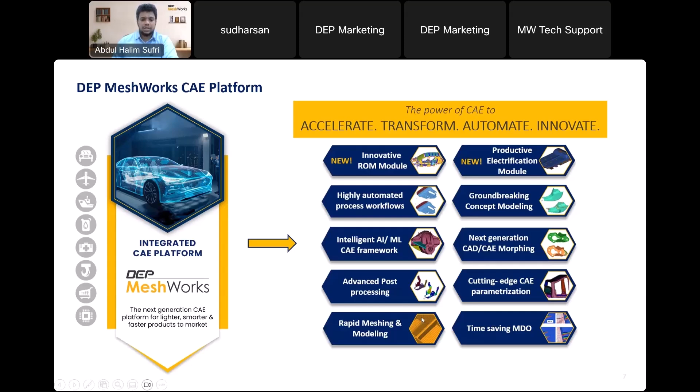When it comes to conceptual stage, MeshWorks morphing and concept modules will help. When it comes to concept and detail phases, MeshWorks CAE parametric approach and also CAD parametric approach is used, along with topology modules. When it comes to all these four verticals, there comes our MeshWorks meshing and model assembly modules, which is what you are going to see in today's session.

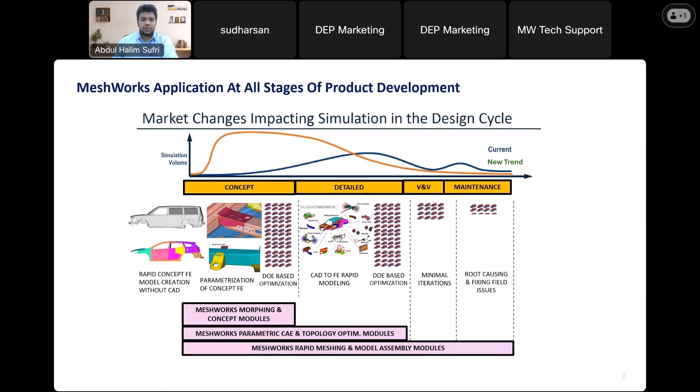That is what we are going to show as a live demo for today. In this session, we wanted to address tetra meshing and give a glimpse about our next webinar, which is morphing and parameterization. We wanted to give some glimpse about auto parameterization, then cover our plastics or mid-plane meshing, some hexa meshing techniques, and then some cool tools about our 1D and 3D bolt connection tools, and 2D and 3D welding connections, etc.

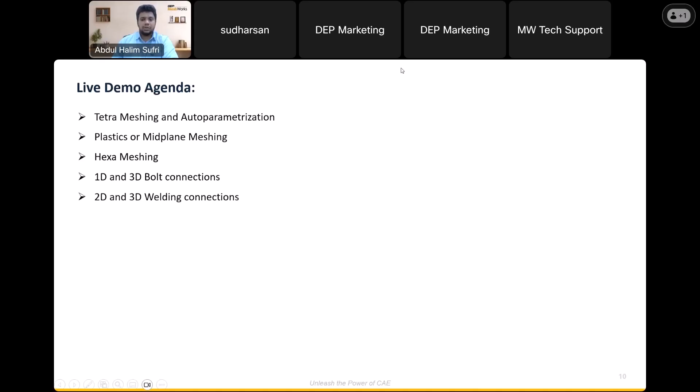I will start with tetra. This is a tet meshing model. Whatever model you are seeing is the cut section of an engine block. This is a typical casting part.

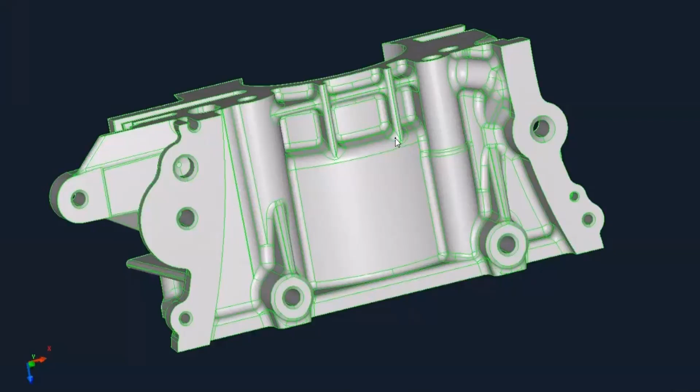Coming to meshing in MeshWorks, MeshWorks deals with template based mesh, which is an interactive batch mesher. Here we can select this component, and related to that component we can select the template. If we have multiple components in one assembly, we can add them here and give the same process, and I'll just execute here.

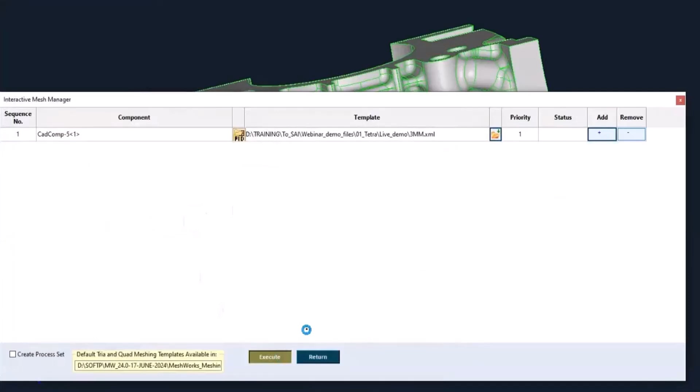Just I will give a small glimpse on how the template will work in MeshWorks. This is our MeshWorks template where we will give parameters. Before going into template explanation, I will show you the MeshWorks library template here.

Here we can see ample templates, all created in-house by DEP based on several case studies. Each template will be for different domains like crash and NVH. Now I'll be explaining this one.

Coming to the first page, here we can see general parameters. Create feature PID will automatically identify the tubes, fillets, and planar surface. Coming to tubes, tubes are based on a diameter range.

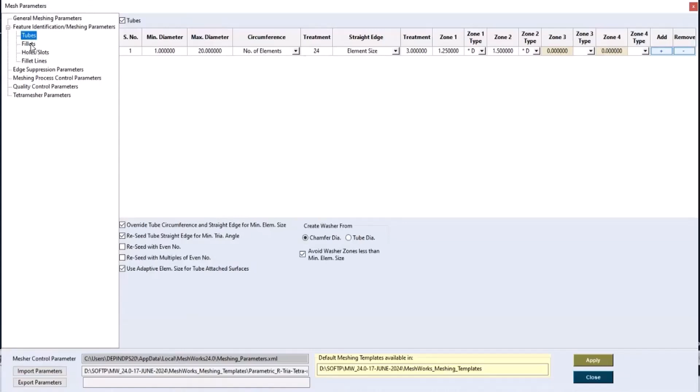Here we can capture the tubes, there are multiple ways to capture them. We can keep 4 zones of washers for tubes. Coming to fillets, here fillets are classified based on radius and range. The user can provide their own requirement to get the mesh.

Also for fillets, we have a unique tool called convex. Here we can separate convex fillet and concave fillet. Coming to quality control parameters, we can set the quality before generating the mesh itself in the template.

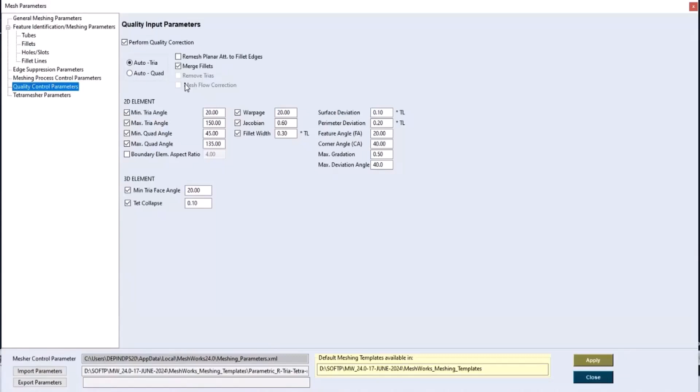Coming to tetramesher parameters, whatever layer we want, like volume layer mesh or higher order mesh, we can give it here itself, and we can save this template for later. MeshWorks template is highly customizable, and we can save it for later use in a similar way for components.

I will show you the previous window. This is the output after giving the template. We can see how nicely the tubes have been captured, along with fillets and planar surfaces. The mesh itself has become very good here.

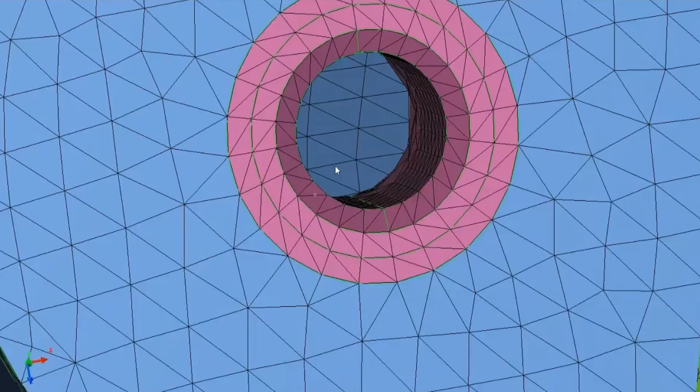Coming to the tubes, here we can see they got captured very well. We can see fillet regions here, and they got captured very well too. The user has no need to change any mesh flow; he can directly take this mesh to the modeling stage.

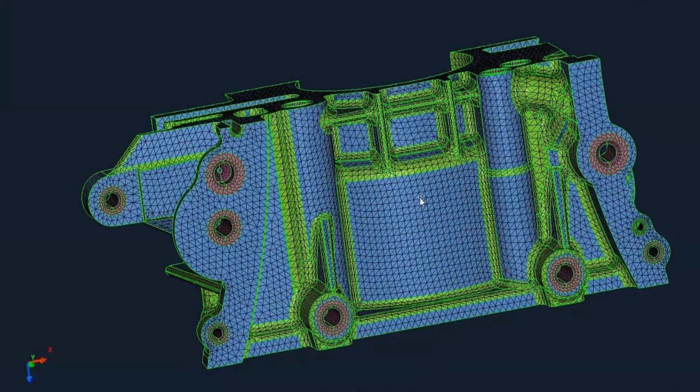Coming to the MeshWorks intelligence, here we can see a small sliver-like surface. By default, if it got captured here, it will definitely fare poorly for quality. MeshWorks has identified this as a sliver-like surface and projected it to the machined surface. This is how MeshWorks has the ability to maintain all machined surface edges, even after doing all the flow correction and quality correction.

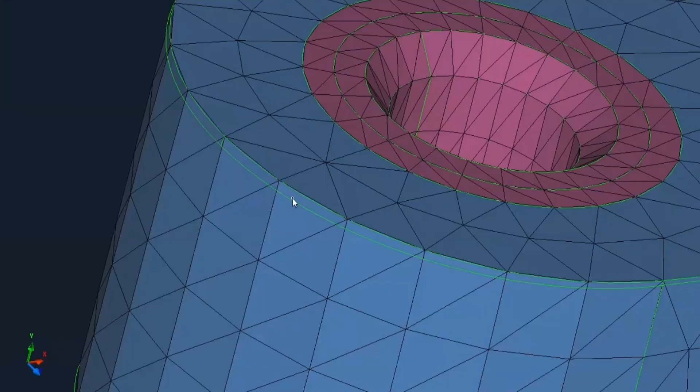Now I will show you the sliced view. Here we have a growth factor like this, and we can see how nicely the mesh has been growing.

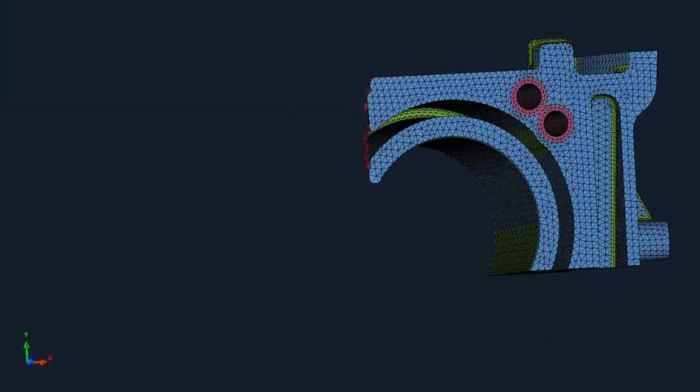Once you've done all the meshing in MeshWorks, the model will become parametric. Now we can perform parametric changes on this model. We have a unique tool called auto parameterization casting. Before going into the tool, let me explain: even if the user is not from a morphing background, if you want to perform a quick DOE study and introduce parameters in hotspot regions, you don't need to depend on a morphing engineer. Any FE engineer can do the morphing with this auto parameterization casting tool. I will show you the auto parameterization casting now.

I'll switch to the morphing tab. These are the four preset parameters in MeshWorks. I will show you the fillet.

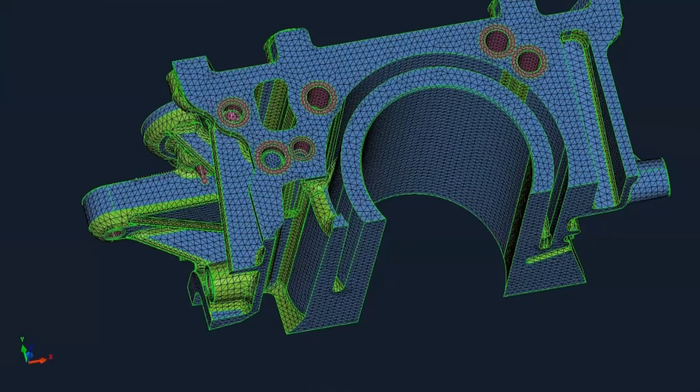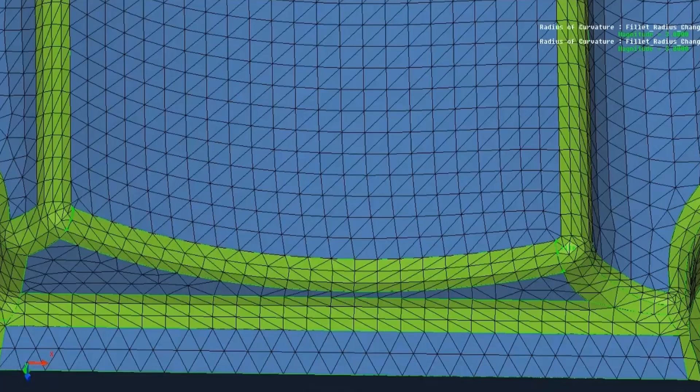Select the CAD surface and just click on execute. At the top right side, we can see the sensor. It is showing the initial radius. We can change the radius. Just let me unlink it.

Here we can observe the radius getting changed. The CAD surface fillet can be changed like this, and we can perform a quick DOE here and save it for later. Similarly, I will show you the tube diameter change.

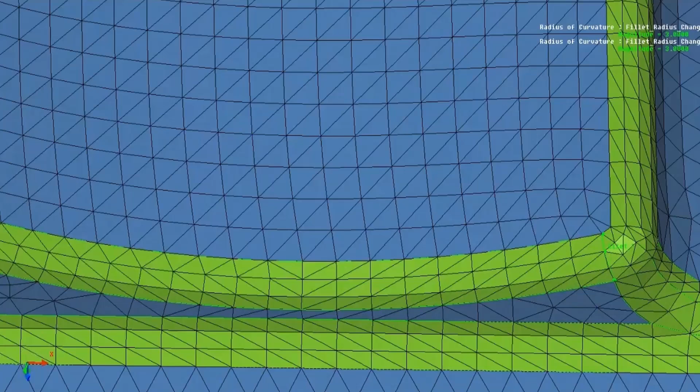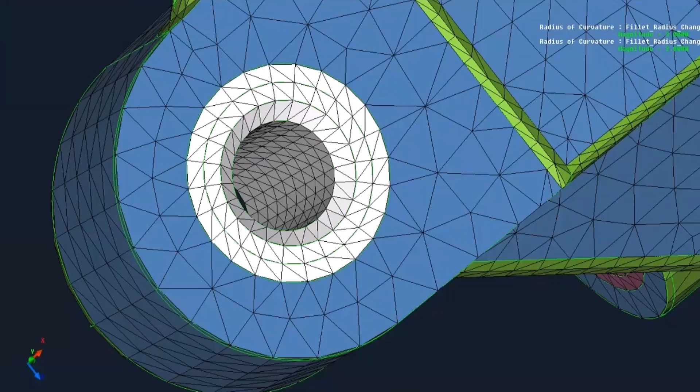Just let me select the elements and click on execute. At the right side top, we can see the sensor for the tube diameter radius. We can change the diameter of the tube by reviewing it. Just let me unlink it.

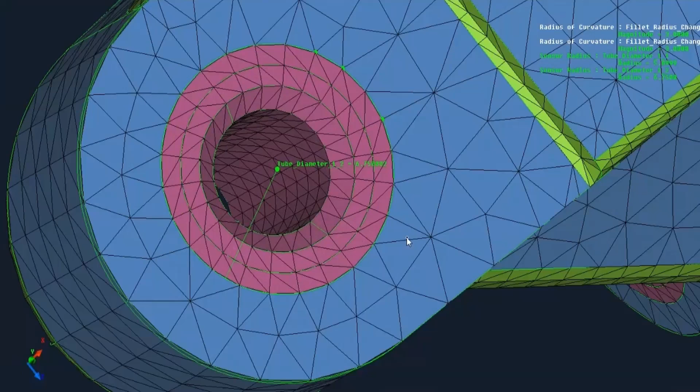Here we can observe how nicely it is getting changed. This is how we can perform parameters in meshing, creating different kinds of parameters directly in FE models.

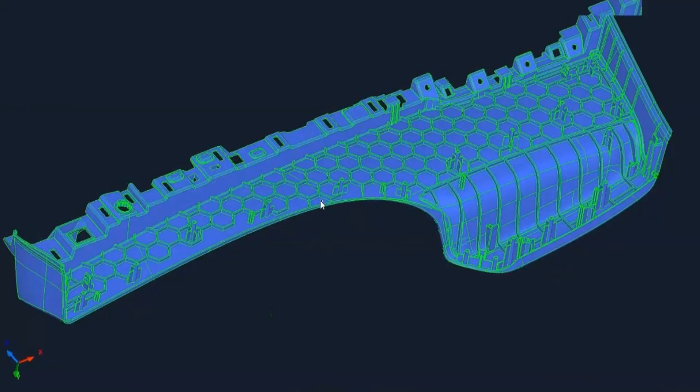Now I'm going to switch to the plastic model. This is the armrest model. In this model, I'm going to explain the workflow. Here we can see so many heat stakes, doghouse, honeycomb ribs, and fillets.

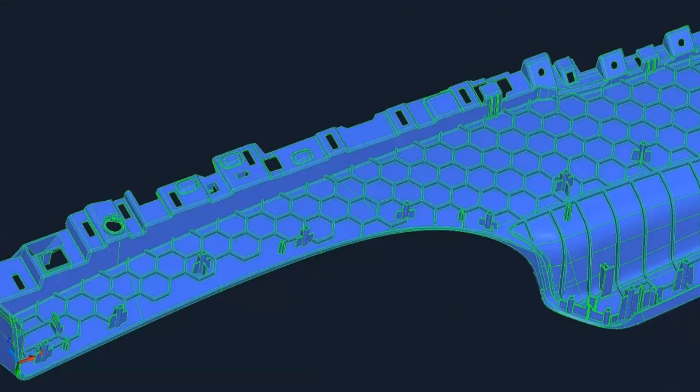All of this will be captured using background processing. We are using a machine learning algorithm that automatically identifies features known for CAD identification and feature identification, including auto generation of mesh, which automatically stitches to the base components like the heat stakes. In MeshWorks, we also have a template for plastic, called auto mid-plane mesh. We just need to select the surface, and all these options will be performed in the background using the machine learning algorithm.

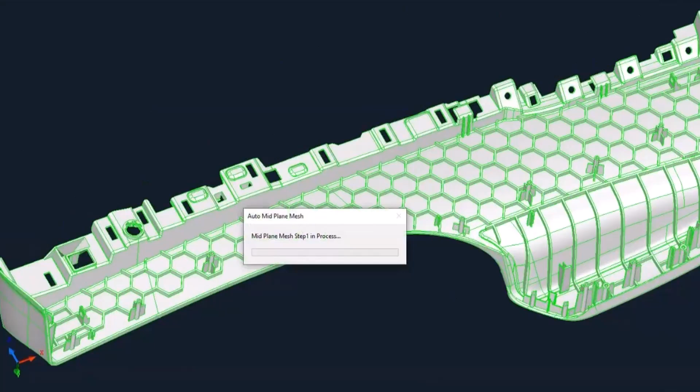In advanced inputs, this is the template for the plastic. Then just click on accept and execute it. It will take a couple of minutes. I'll show you the output.

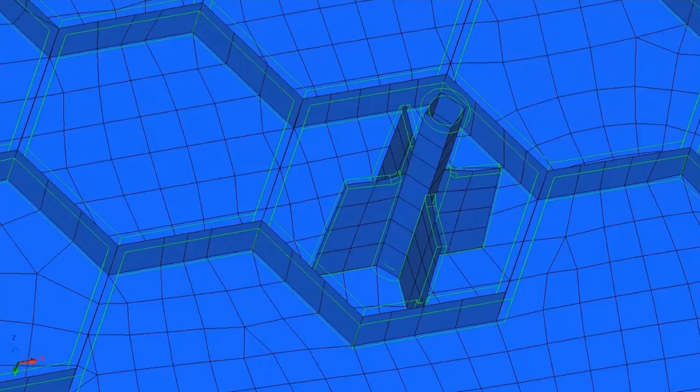This is the output after generating the mesh. Here we can see how nicely the heat stake got captured, and it is also properly projected in the mid plane. Here we have layered fillets, all captured very well. Here we can see how nicely the rib has been projected and stitched to the base, and all of this got projected in the mid plane.

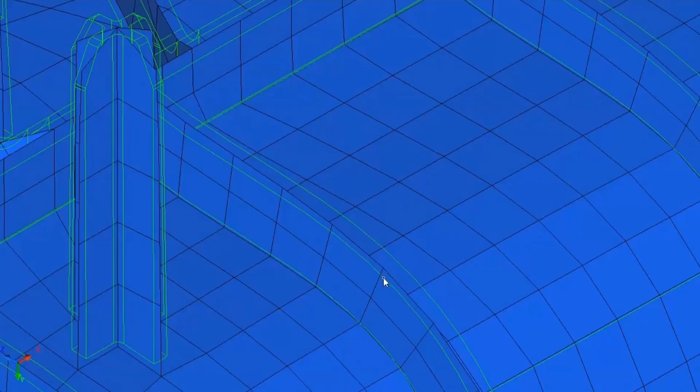Coming to mesh flow, to improve the mesh flow in MeshWorks, we have ample tools to do that. I will show you basic mesh editing. To reduce the trias in the model, we can...

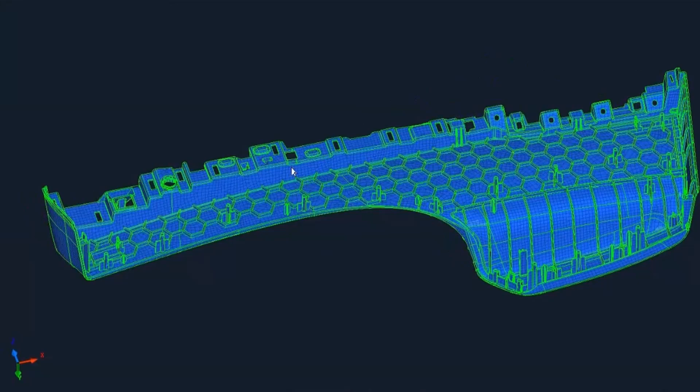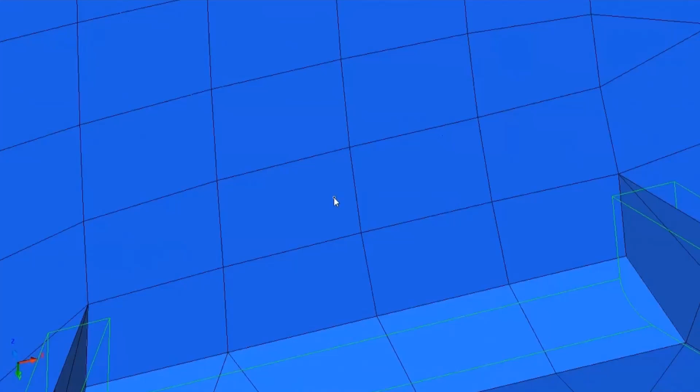Here we are having opposite trias. For example, if we click on this one tria and move it, it will show the direction we can move in. Like this, we can combine the trias and reduce the trias in meshing. We have ample tools similar to this.

Initial mesh has come out very good. Now I am handing the stage over for the rest of the demos. Thank you.

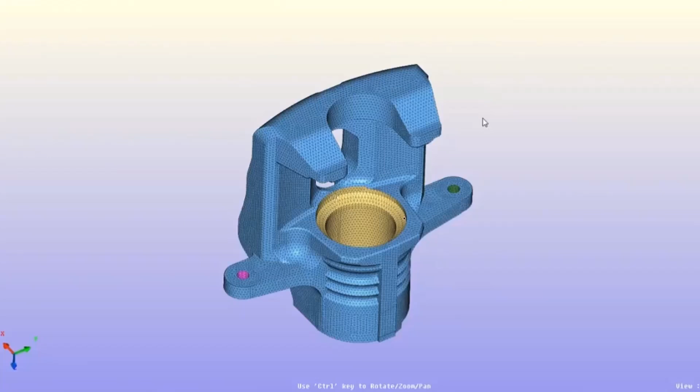Now I will continue this demo with Hexa, bolt connections, and seam welds. First I will go with Hexa. Here we have a caliper, and this is a shell element. So we use these shell elements for extruding Hexa.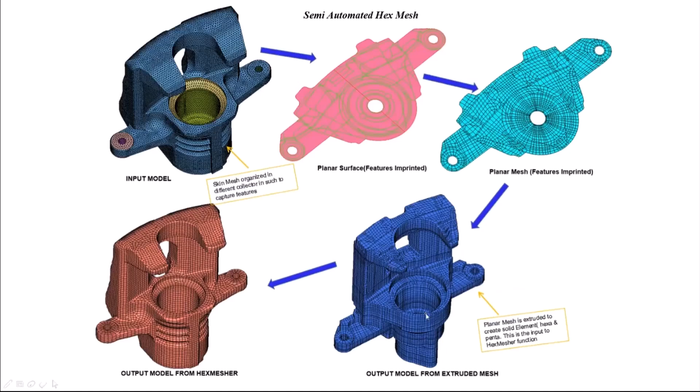MeshWorks has the ability to extrude hex mesh from both CAD and FE models. The shell may be like a tria or quad, and it will extrude the hex mesh. Now we'll see the hex mesher tool.

So here we have this hex mesher. For this tool we just need two inputs: one is the outer geometry, and one is the inner cavity, which is nothing but the extruded hex mesh. I will input that.

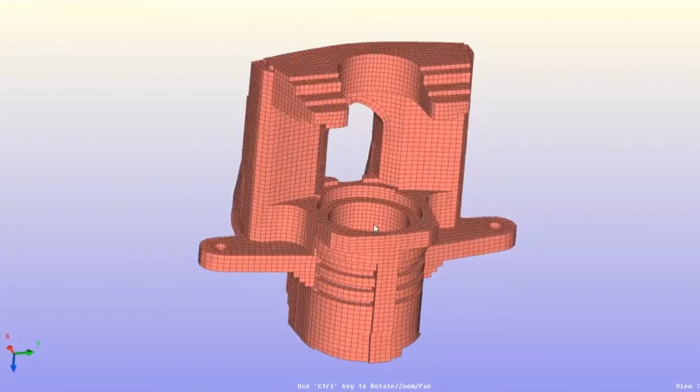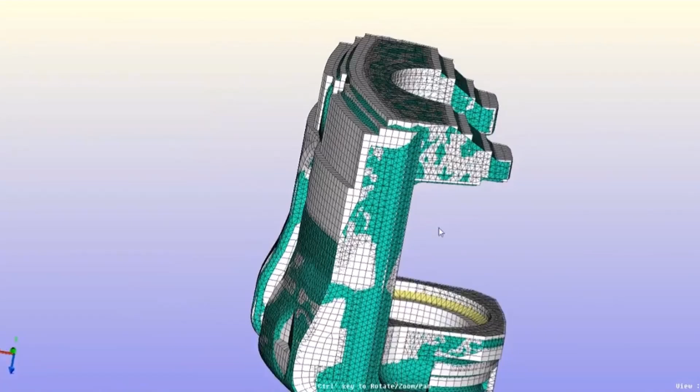So this is the extruded hex mesh. Here we have some sharp edges and an irregular feature. So I'll select this as a cavity, and by giving the element size and clicking on hex mesh, this process will execute. Here you can see we have a sharp edge. How nicely it will project, I will show you now.

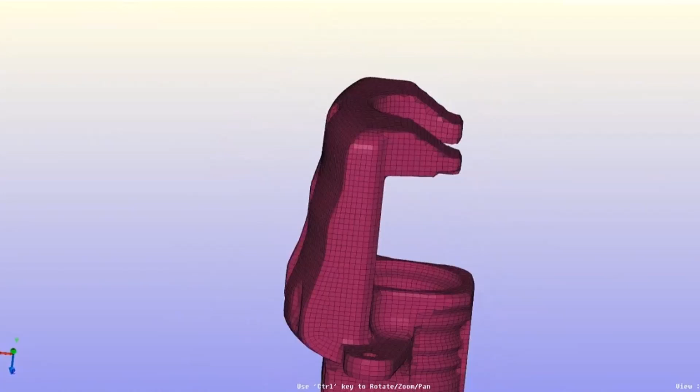So here you can see how nicely it got projected. The working of this tool is that the inner cavity will grow 1 or 2 layers, and it will use our morphing techniques for projecting to the outer geometry, this one. This inner cavity will adopt the mesh of the outer geometry using plastering techniques.

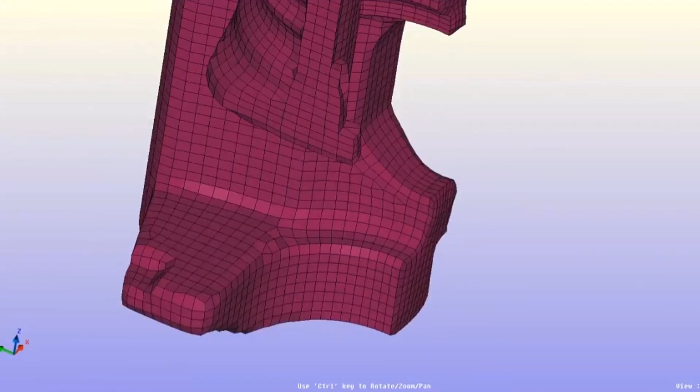In this region, you can see how nicely it captured the fillet here. So by using one tool, we can capture the hex mesh fillets and features easily with this tool.

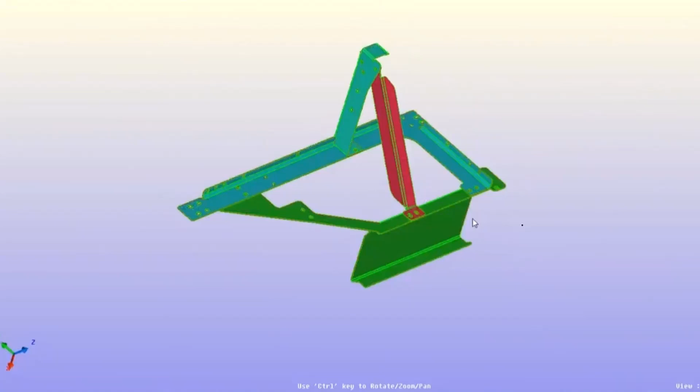And now I'll go to bolt connections. So here we have a sheet metal assembly. In MeshWorks, we can create the bolts for the whole assembly in one shot, no need of creating manually. I will show you that.

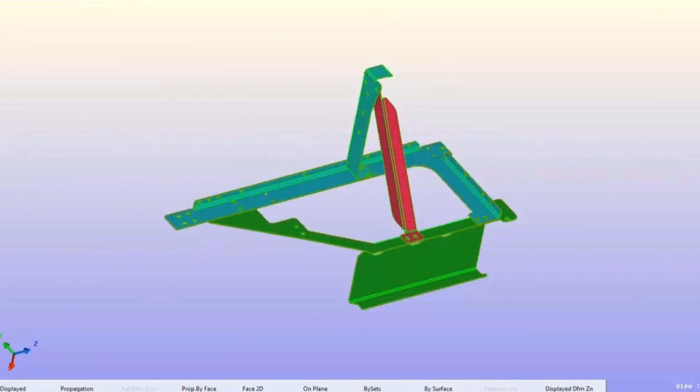For that, I will use this bolt connection here. I'll select all the elements, and after clicking on detect hole, it will detect all the holes like this. But it will only highlight the regions where we need bolts, like in this region. So the user can go with the fastener types and connections.

Here we don't need to create the property manually, this tool will automatically create the property. I'll select the material here, and the user can go with the DOF if there is any DOF requirement.

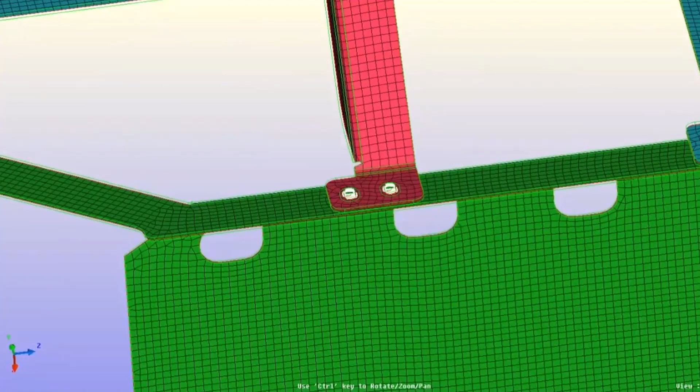So after realizing, we can see how the spider element got attached with the nearby shell and the linking element here. So here we have an info table with basic information about these welds and bolts, including the realization status, whether those bolts are realized or not.

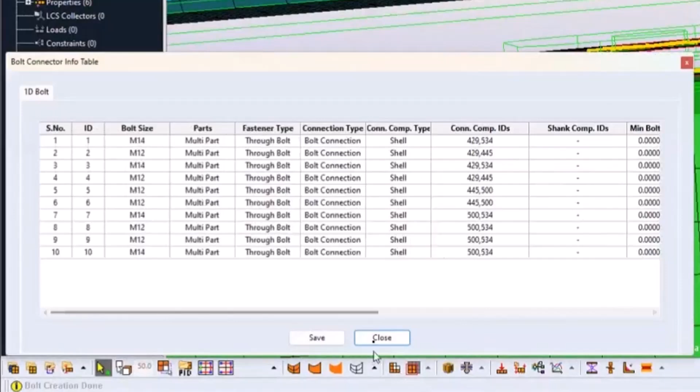So now we'll go for 3D. Previously we saw one bolt connection for a whole assembly in one shot, which reduces the time for creating bolts. Now we'll see it for 3D, using the same bolt connection tool.

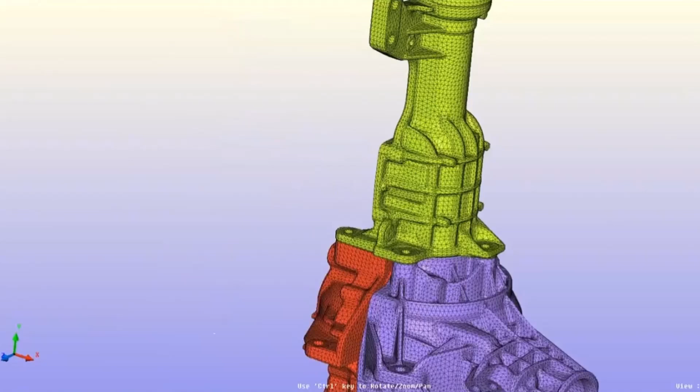Here I will select these elements as the threaded part, and I will select the unthreaded part as this one, where the bolt head will occur. After detecting the hole, it will detect all the holes, and it will only highlight the region where we need bolt connections, like this.

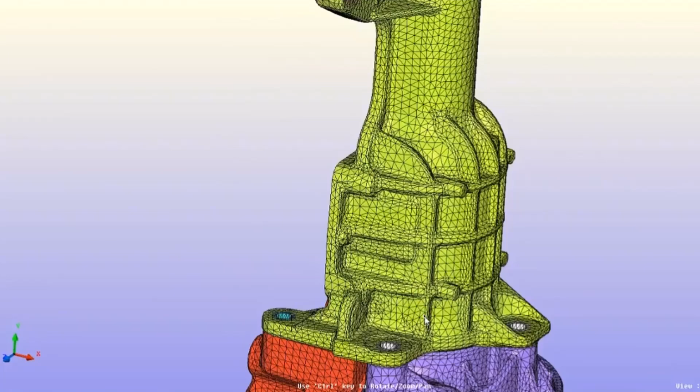As we select only these two elements, here we got this highlighted region, and here we have this bolt defined.

As we have seen templatized mesh for tetra mesh, we have the same with bolt too. Here we have some bolt designs where we can import different types and sizes of bolts, with washer and without washer. And here we have a diagrammatical view of bolts, and the user can go with the mesh type as tetra or hexa based on requirement.

And here we have basic parameters which we can change. And this template, this is the customized one. We can customize our bolt here itself.

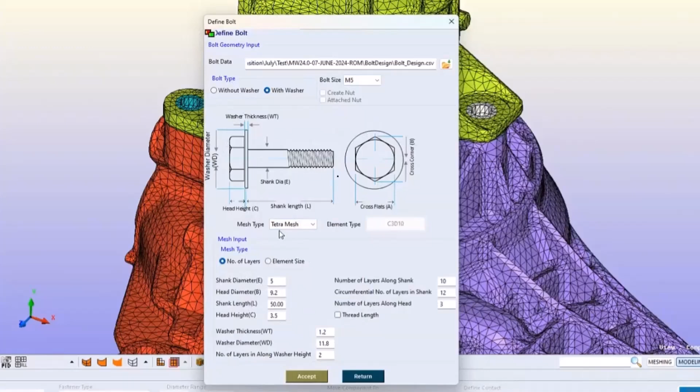And later we will have the pre-tension layer here. The user can go with the pre-tension layer and mid pre-tension layer, and if no pre-tension layer is needed, can go with no pre-tension layer.

And here we have the contact. This tool will automatically create the contact between master and slave elements by detecting them automatically. No need of creating the contacts manually.

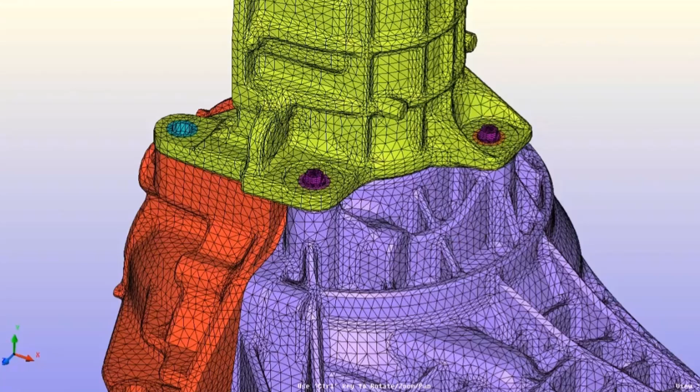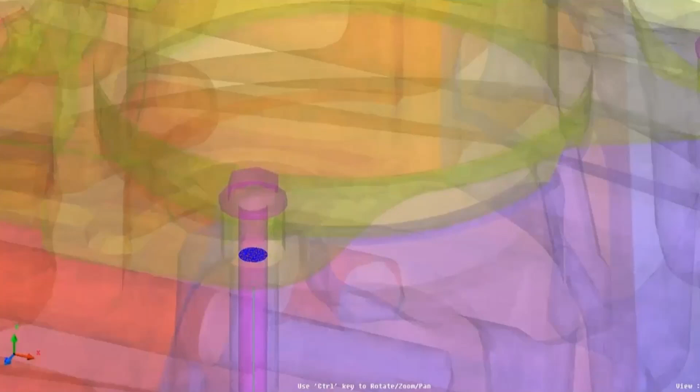So after realizing, you can see the bolts here. We have created the contact. Now we'll see how our contacts got created. So these two are our bolts, and here we have the pre-tension layers for these two bolts and the contacts. So this is how we can create the contacts and pre-tension layer for bolts automatically.

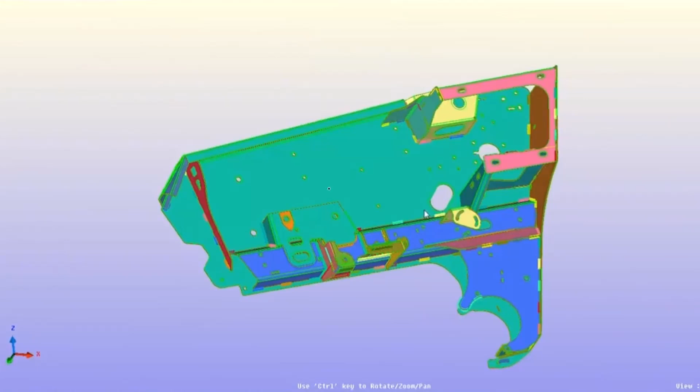Now we'll go for seam welds. Here you can see a sheet metal assembly. For creating these welds, I will go with seam welds here.

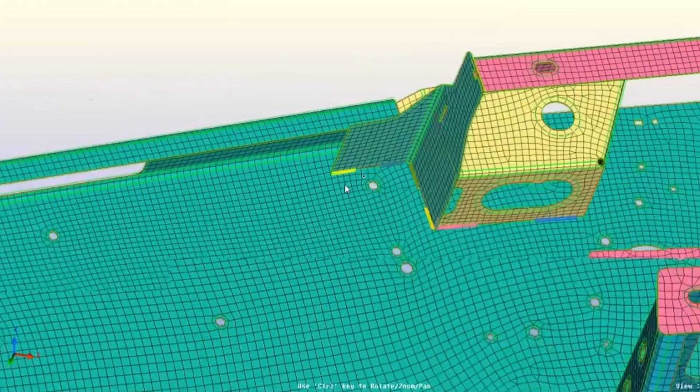In MeshWorks, we can create the welds for the whole assembly in one shot with the help of CAD curves. If we have CAD curves, we can create weld connectors. So I will go with auto connector creation here, select all the elements and all the CAD lines, and the user can go with the weld element type here.

What this auto connector creation will do is automatically detect the master element and slave element, and based on that it will create weld connectors. You can see here it got created.

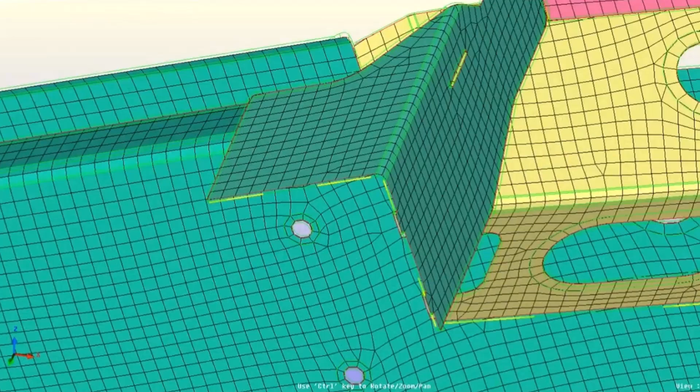Now we will realize the welds. As we have weld connectors, I will go with weld connectors here. For the whole assembly it will take a couple of minutes, so I will just create the welds in 2 to 3 regions.

So we can set the DOI for welds also, and here we have heat affected zones. If the user wants heat affected zones, they can go with that.

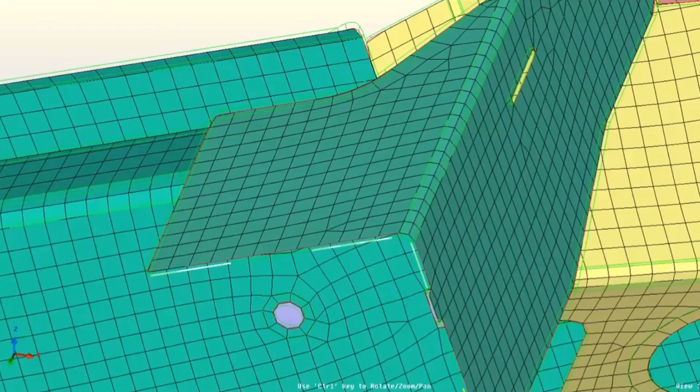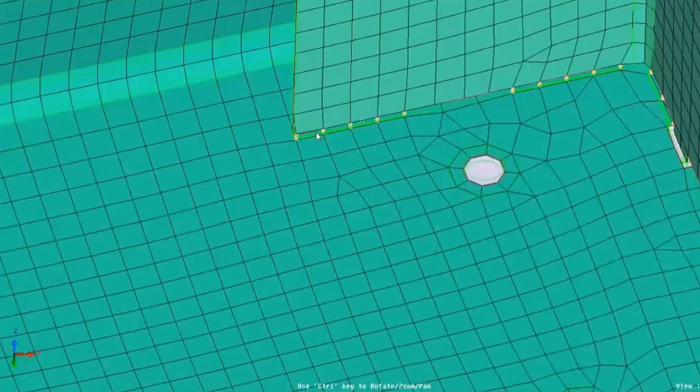So after realizing the welds, you can see how these welds got created. Now I'll show you how we created the weld for the whole assembly, how it got created. So you can see welds got created in these regions, here and here. So this is how we can create the welds for the whole assembly in one shot by using MeshWorks.

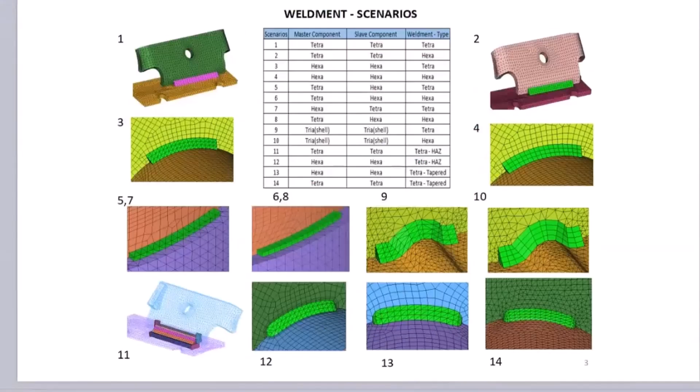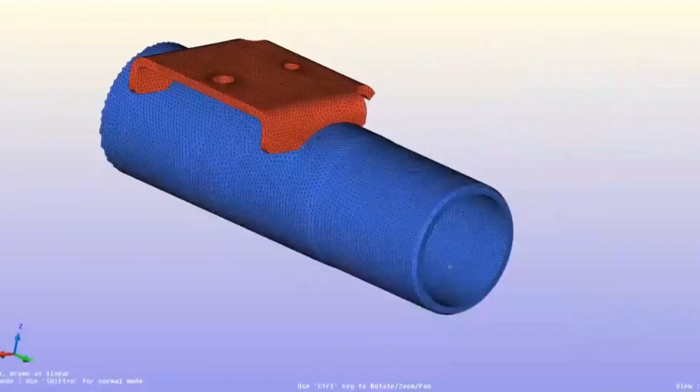Now we'll go for 3D weld creation. For 3D weld creation also we use the same tool, which is seam weld. First we will select the nodes, and I will select this element as my master and this as the slave.

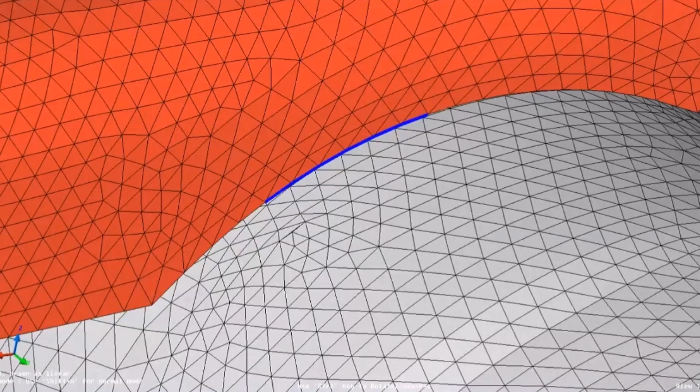In LN type we have 3 options: merged nodes, coincidence nodes with contact, and non-coincidence nodes with contact. I will go with coincidence nodes with contact. Here it will automatically create the contact between slave and master.

And later we'll have solid weldment inputs here, where we have different profile options for our welds, like flat, concave, convex at start and concave at end. And here also we have a heat affected zone.

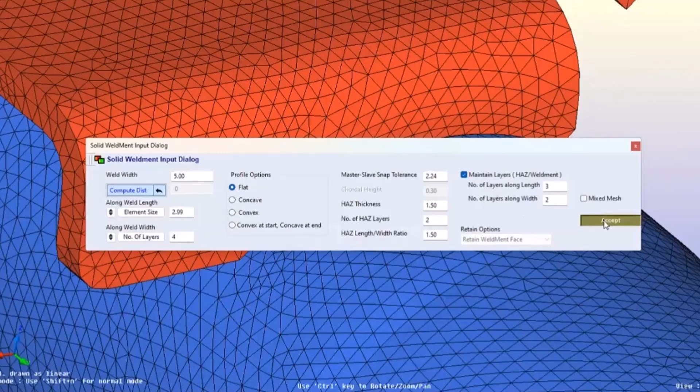And after clicking on preview weld, you can see it didn't stitch, but after realizing it will stitch to the master and slave. And here you can see the contact got created by this tool, and now it shows 2 contacts. So we'll see those contacts here.

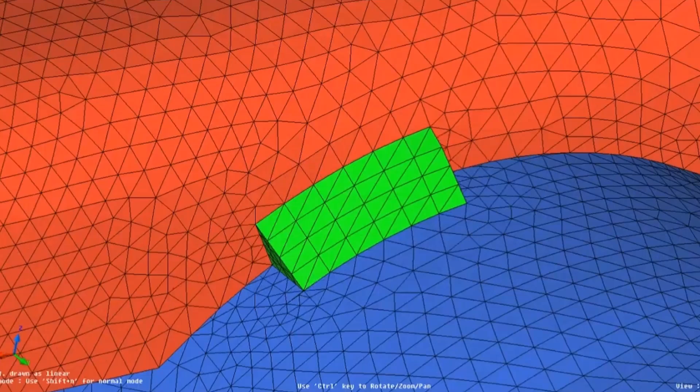So this is our weld, and here we got our contacts, which were created automatically by this tool. In MeshWorks, we don't need to create contacts manually. The tool itself will create the contacts automatically by detecting the slave and master. And now we will see different profiles for 3D welds.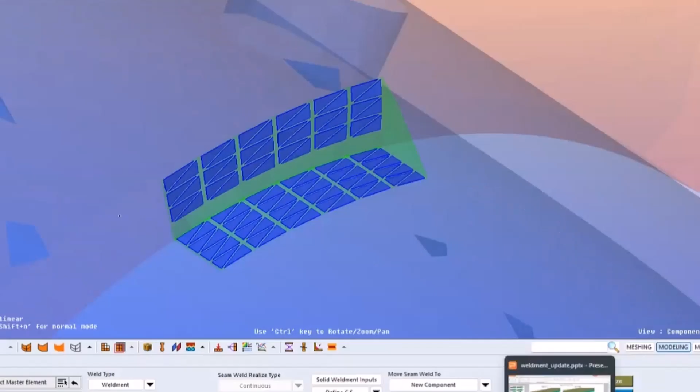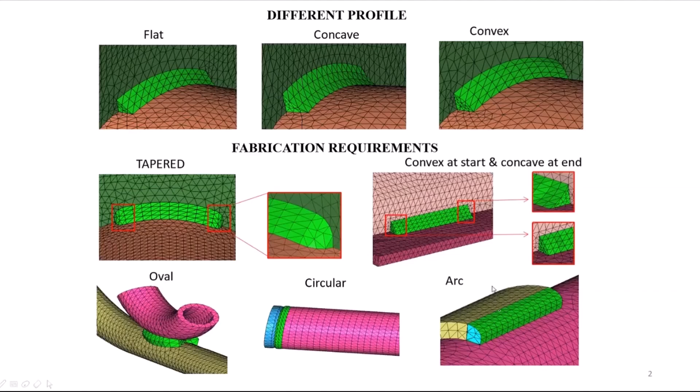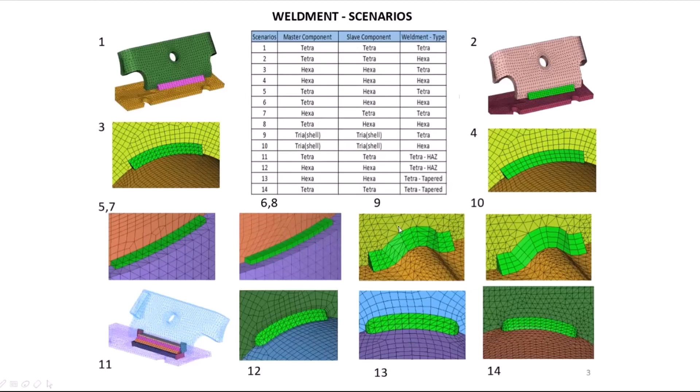Now we'll see some different weldment scenarios where we'll have master, slave, and weld type as tetra-tetra-tetra, hexa-hexa-hexa, tetra-hexa-hexa. We can create different types here. So this is how we can create the 3D welds in MeshWorks.

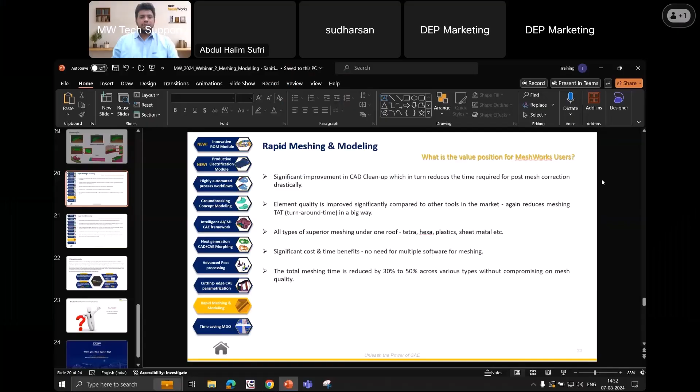So as you all saw, we have extensive automated tools for meshing and modeling functionalities. And you've also seen a glimpse of how one can do morphing in MeshWorks without even knowing the morphing knowledge, using parameters like how I have created on the model.

So these are all some of the live demos which we wanted to show. And the main takeaway here is that for meshing, there is no CAD cleanup required. There is zero CAD cleanup needed for any kind of meshing in MeshWorks.

Regarding the quality of the elements, once you do the meshing in MeshWorks and the output has been generated, any of our competition tools which need to achieve that particular quality require at least 30 to 40% of manual time. So there is a lot of turnaround time which one can save according to our mesh outputs, and our rich output of meshes has been produced across all the different domains.

Tetra, hexa, plastic, sheet metal, etc. And there is no need of using multiple softwares here, like one for tetra, one for hexa and all. So all the meshing is under one roof, you can achieve it. And clearly you can achieve 30 to 50% of time reduction across all the meshing and modeling functionalities.

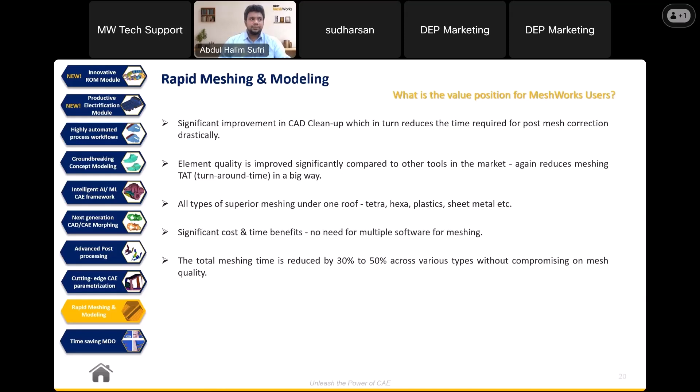So when it comes to the modeling approach, you can see there is an extensive automated approach of doing the modeling, which saves a lot of time further from meshing what you saw as a time saving. And also, once you create modeling in MeshWorks, it automatically connects the dots - once you create a 3D bolt, one can create the contacts over the model automatically.

And for the entire assembly, you can create it, which saves a lot of time. Also, one can do the parameterization into any kind of weldings. For example, whatever Joseph created with the weldments - those weldments can be parameterized with number of welds, length of the weld, or width of the weld, etc. as parameters.

And after that, the high standards of doing the modeling with our heat affected zone techniques help study the heat propagation for more accuracy of results. Moreover, you can see up to 60% time saving in your modeling approach with our automation tools.

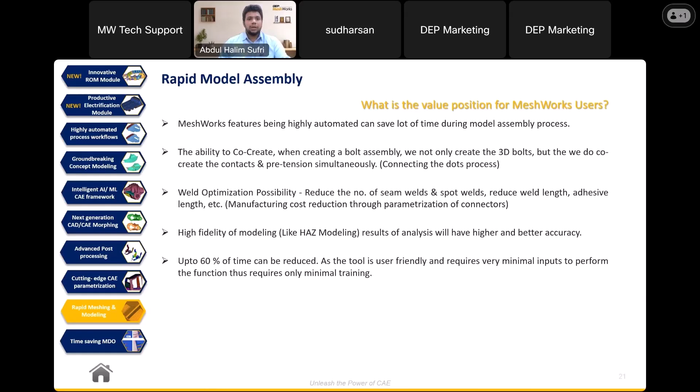And with that, today's session of meshing and modeling has been completed. So all around, when it comes to MeshWorks, we transform all the product development as CAE or CAD domains, and we accelerate our workflows based on new tools like ROM model or a module or some other optimization techniques, etc.

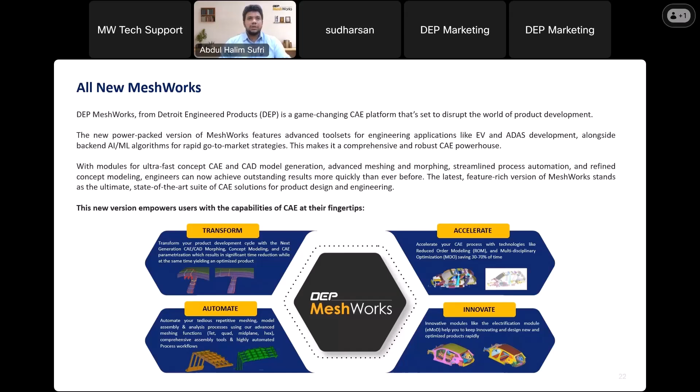And also we automate with multiple modules with inbuilt structures of automation which have already been integrated into MeshWorks. And we innovate new categories of modules every year, something like our eMoD for the new electrification generation. These are all about MeshWorks, and you'll see further live demos in our upcoming sessions. And if this session was missed, you can watch it on YouTube.